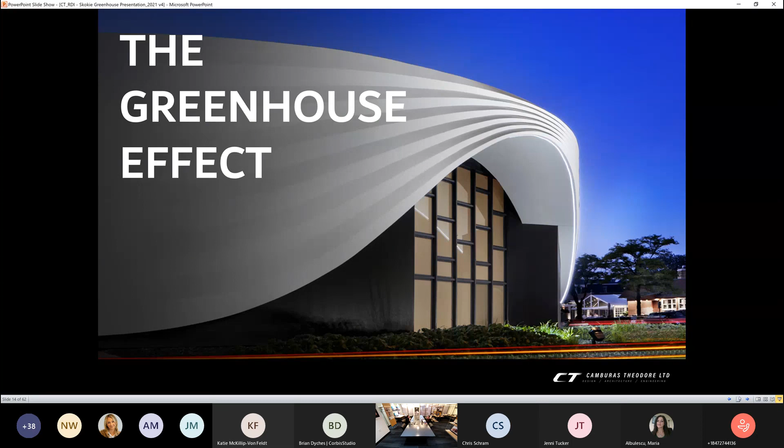With that, we're going to start our journey on Greenhouse. And for those who aren't too familiar with the greenhouse, we're just going to run through a couple of drone shots that showcase the exterior, the facade, and take you inside to show our effort in translating the kind of curvature and making a cohesive design from outside in.

Also, if you're not familiar, we were working with an existing building, which we'll get into in a moment, showing our site analysis. But you can see, like Peter was mentioning, the power of subtraction, some of these kind of philosophies and design methodologies that we used to inform the form, in addition to the site and the massing.

So here's a quick diagram just showing some of the things we were looking at. The fact that the building was oriented at the street corner was very unique. It was bookended by two towers. The curving facade, obviously very unique, all things that we wanted to capitalize on.

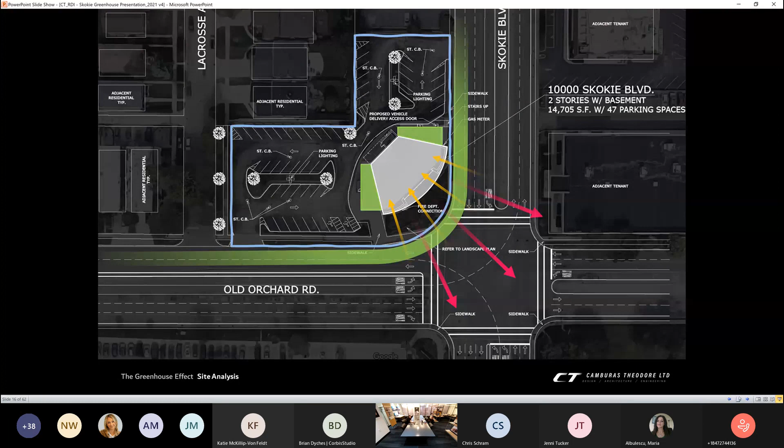And with the addition of a massive curtain wall system that just let light into the space, into a two-level space that we had to utilize. And here's just another aerial view of the building.

So on this slide, I want you to take a look at what's going on here. Over the years, this has been an amalgamation of multiple designs, multiple design ideas, and a morphing from traditional to postmodern to classical. It started out in the mid-'60s as a Sidney Epstein store. It was a flagship store, and it changed into a furniture store, a bank.

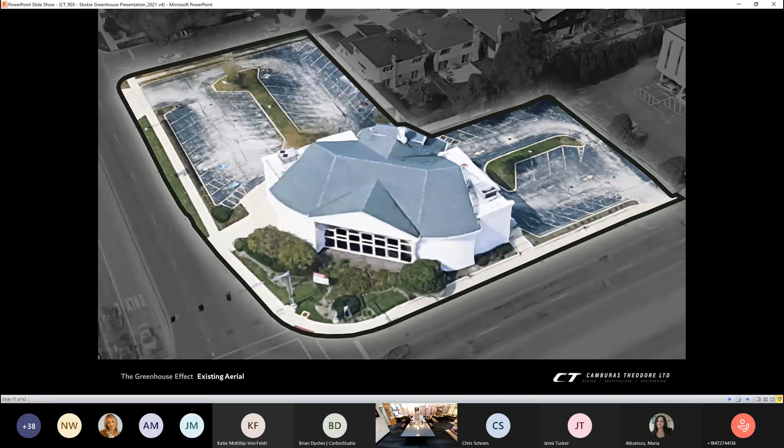It's had several lives, but this is what we were given. So for better or worse, this is kind of where Greenhouse started. And another perspective view of the existing building, diagramming some of the moves and gestures that we thought of in plan that translated to a perspective view.

A few things we'll get into, but about the curve, it starts gently lifting off the ground and crescendoing at the center, creating the massive opening for the sunlight to bleed into the space. Capitalizing on some of the good aspects of the existing geometry, and eliminating, like Peter mentioned, some of the things that were either add-ons or did not belong to the intrinsic massing of the building.

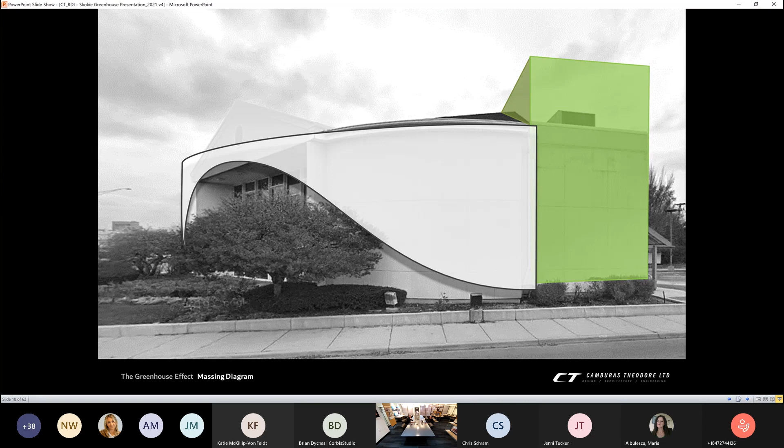So hence removing the gable roof. Stepping back is not necessarily a bad thing sometimes. It lends clarity to where you're going. If there are pieces and components that are worth saving, we save them. If they're not worth saving, we eliminate them.

And from a retail perspective, the towers made sense as these towers essentially for signage, but also our gesture was to increase the height of the towers to promote the signage and also to conceal some of the rooftop units that were going on in the space.

You can see what was added through the process was a pleated texture across the facade, which was not originally there. Through the process of taking our sections, we wanted to capitalize on what we were doing already with the curve and use technology to our advantage to push the envelope beyond just ordinary geometry.

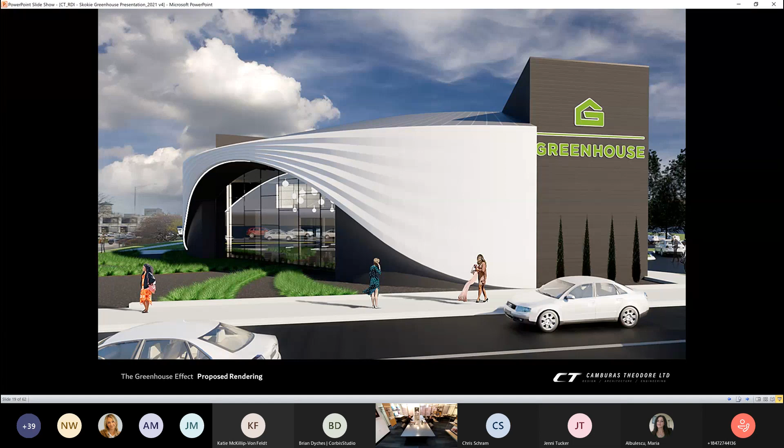It would seem counterintuitive in retail architecture to obscure some of the windows, but we resisted the opportunity to put all the windows front and center on the street because we believed it'd be more alluring to draw people in by obscuring some windows and creating a sense of anticipation, rather than exposing it all, which is the knee-jerk reaction to typical retail architecture.

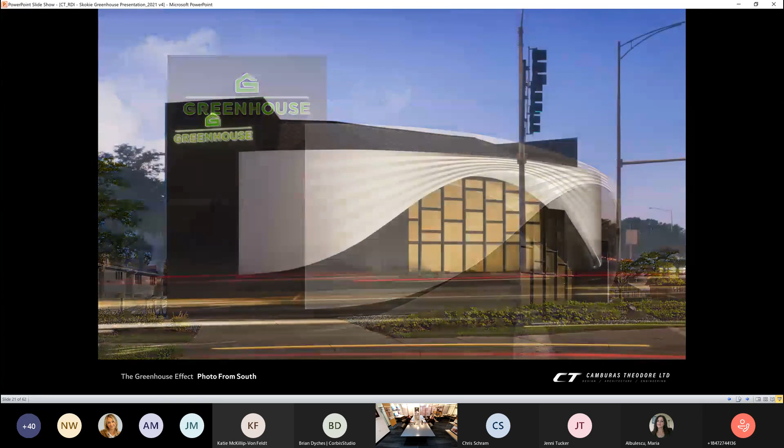Gradient. Now we want to talk about this form and what's going on with the gradients. Having the ability to use technology, we're going to show how we actually use those tools in the next few slides. This might seem like an overly simplistic quick view, but what's going on here is actually far more complicated than it appears.

The gradients of the lines sinuating up and down in this form actually change in height and dimension, decreasing to zero. They go from a gradient of 0 where they touch the ground to an offset of approximately 6 inches, increasing in width and size as they decrease in dimension toward the ground. There are complex shapes turning the corner, changing in gradients, size, form, and function. Communicating that to a contractor or fabricator in the past would have been a very difficult task. We're going to show you the tricks that made this possible.

But when you look at this, everything flows. It's simple and easy on your eyes, but it's far from simple from the standpoint of complexity, erection, and construction.

To Peter's point, it took a lot of iterations to arrive at this solution, thanks to Peter always pushing to fine tune it. It could have been protruding too far at the top, or there was the idea of it coming to a zero point — could we really execute that? Everyone knows it takes a team to build something like this, so we had to work with the contractor, the budget, and the city, all these elements to come up with a design that was buildable.

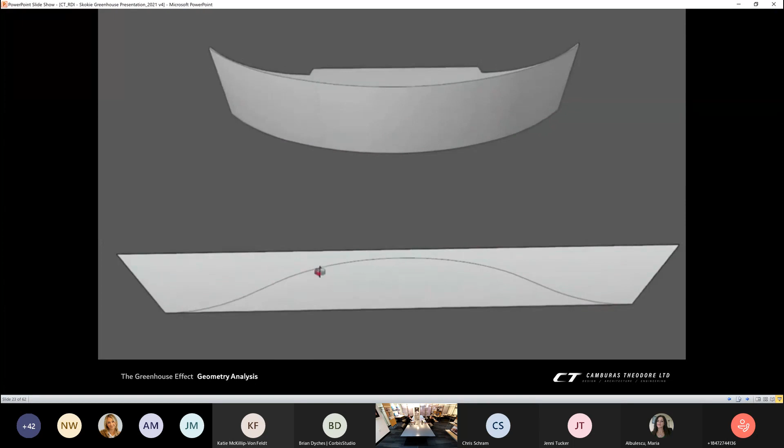What we're going to show you in a moment is just the final iteration, but we went through a lot of different tests. There's a longer version of this video online you can search for under our name and Skokie Greenhouse, but this essentially shows the Boolean effect used to get the curved geometry.

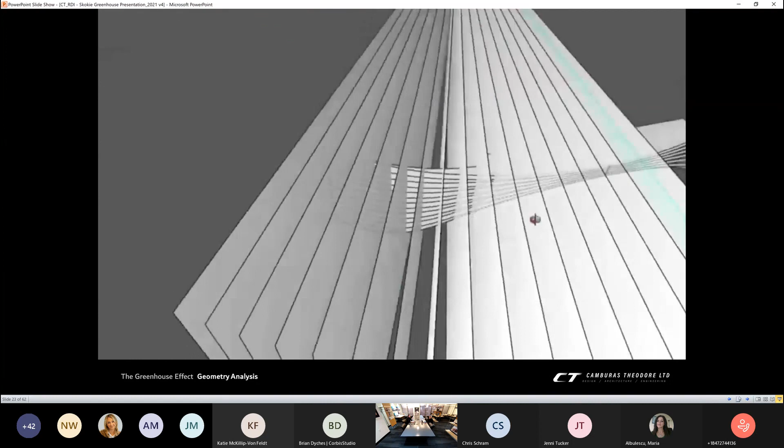This is a quick look at lofting the line geometry for each individual pleat, as we'll call them, and the use of parametric design translating into our Revit program. Some of it was modeled in SketchUp, then brought over to Revit. You just saw how we radiated the sections across the facade and how each of the panels is cut and individually numbered to be put onto the facade.

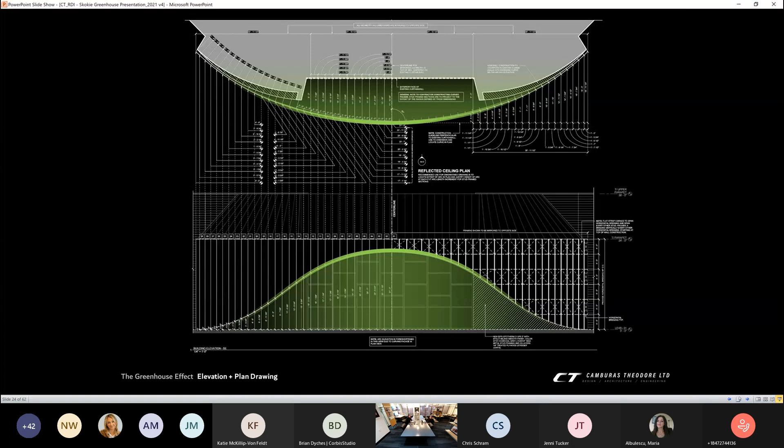All of that information is translated into a drawing like this for the curve. It looks complex, but it's really only calling out the different elevations and plan views to achieve the double curvature facade, which translates into our framing system. In the video, when we took the radial section slices, that was calculated on an arc radius of 16 inches, so we knew we were working on a framing template the framers would use and sheath accordingly, working on a 16, 32, 48 kind of modular system for our foam pieces.

So what you're seeing here is the skeleton before it was sheathed. The whole time this was going on, we were constantly checking and rechecking what we thought was right, what's proportionally correct, and what the gradients should be. This is truly a project that kept changing until the end. I don't mean changing from a standpoint that things fundamentally changed, but it kept getting further refined by having these tools and applying them in the real world sense.

We wanted to make everything as precise and accurate, but as buildable as possible. Without these tools, we would never have been able to convey to the contractor what our intent was. We literally had to construct this in the virtual sense and the real sense together so we could convey to the contractor how he was going to put this up. Contractors are really only as good as the tools you give them, but these tools made it like an erector set for them and gave them the roadmap to a successful project.

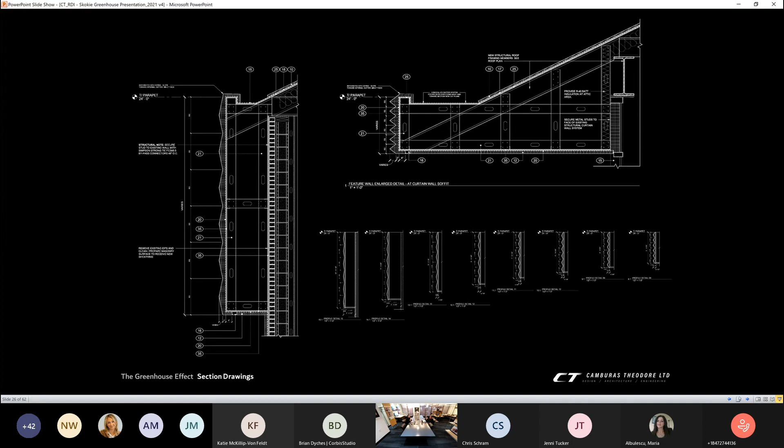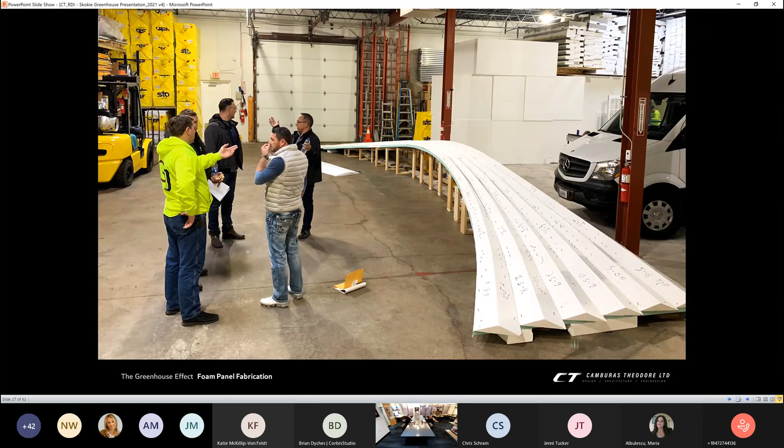We're going to show you some slides where the contractor actually gets engaged. We're in the shop with the contractor, literally building the mock-up with them, CNC cutting the foam with hot wires and machines, and putting together the pieces in a numbering system so each section could be broken down into small segments and erected in the field exactly the way it was meant to be designed.

If you were to try to construct this in the field, or rasp the foam in the field, or leave it up to the installer in the field, the precision would be off and the project would fail dramatically. But by controlling the limits and extents of each piece, and knowing exactly what those pieces should be by numbering them and erecting them as in this photograph, you could make the impossible possible.

Not only could you make it possible, you could start creating even more complex designs and do it within budget, because you're essentially giving them small segments of what your ideas are, and limiting how far they can go on their own before the constraints are put in place. These images are a great example of how we thought through the actual physical implementation of all the pieces to make a concept a reality.

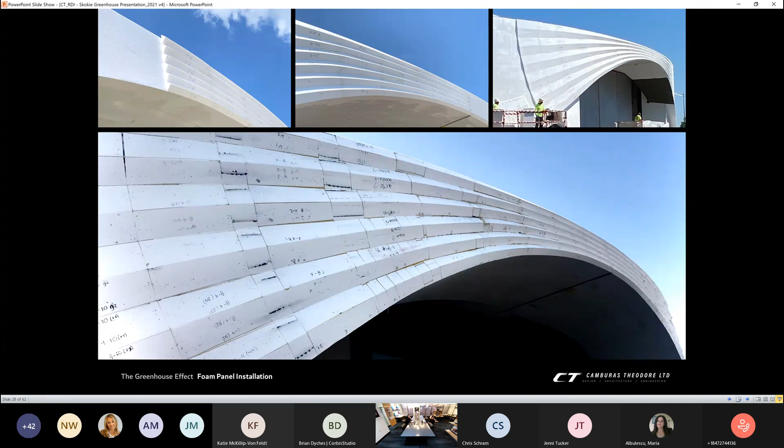The beautiful finish texture, after it was sanded, rasped, and all the filler pieces were added, is a plaster finish — more than just an EIFS finish. It's a Sto product, one of their most advanced lines for our temperature and climate zone, so we know it's going to hold up.

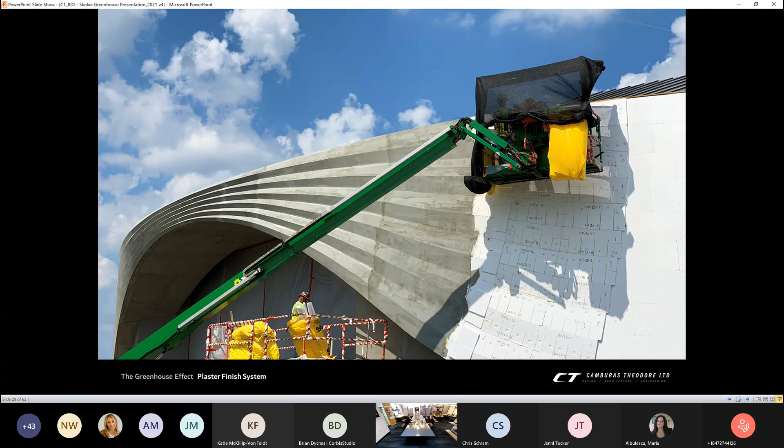It's finer than a sand grain finish, so it looks plaster smooth, like drywall smooth. It's basically a level 5 plaster finish that these guys sanded, added, and sanded again to get it to this point where there's not a blemish visible from the human eye.

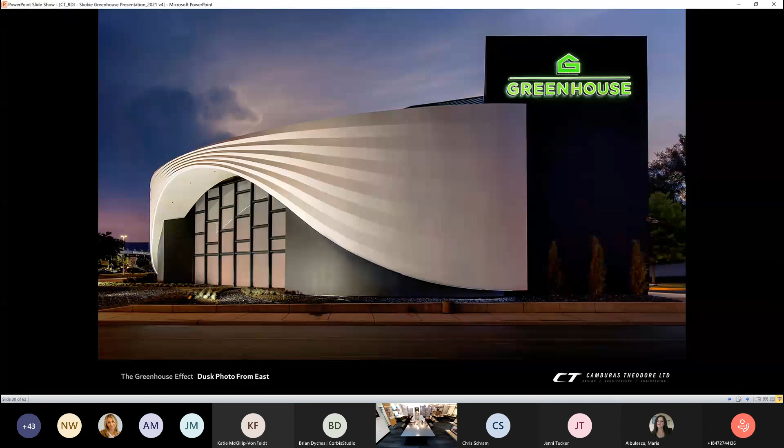This was actually a research project for Sto. They took it upon themselves to reach out to us and use this as an example for the product, to showcase what it's capable of — that it's more than just a rectilinear foam panel with reveals type of material. It can be used in combination with the foam and some of these new fabrication technologies or methods to produce something like this. So here's just a couple of photos of the finished product.

Now we're going to take you inside the store, and Steve will walk you through the interior and the thought process in that evolution.

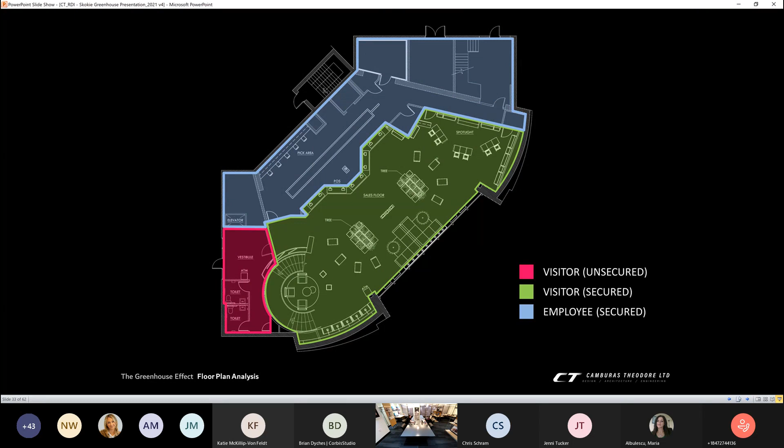The idea for us, again, was that we had an existing building to work with, but when we were using the power of attraction and the experiential factor on the outside, it was important for us to translate that into the inside so we had a cohesive project. Fortunately, some of the forms did carry in, and what you saw there was just the delineation between secure and unsecure areas. Here's a quick look at how we wanted to orient some of the interior spaces based on the window and the kind of double height space that you'll see in a moment.

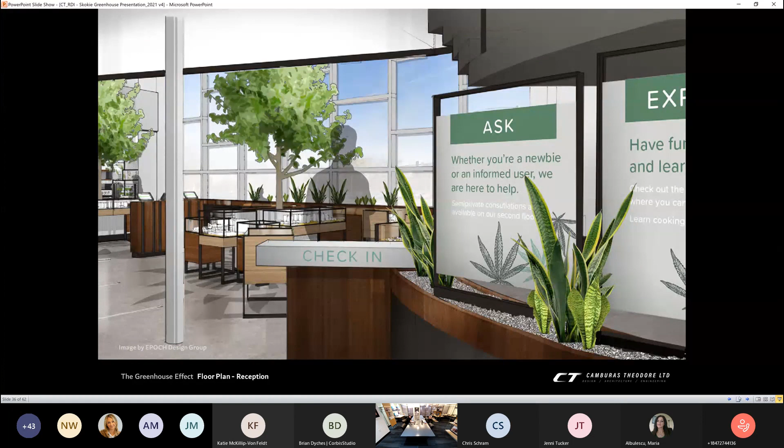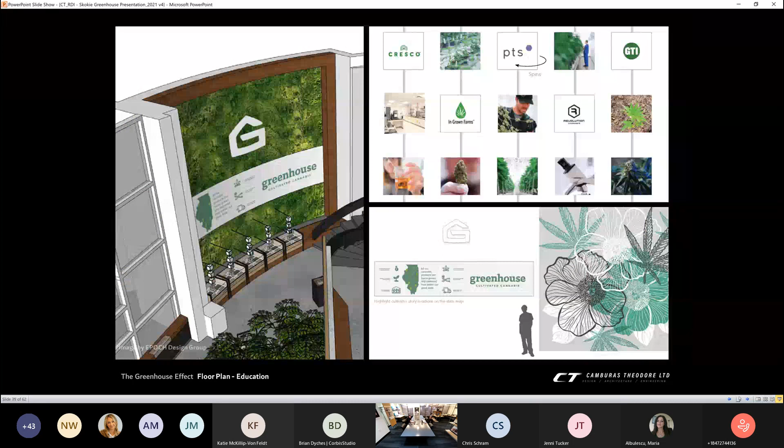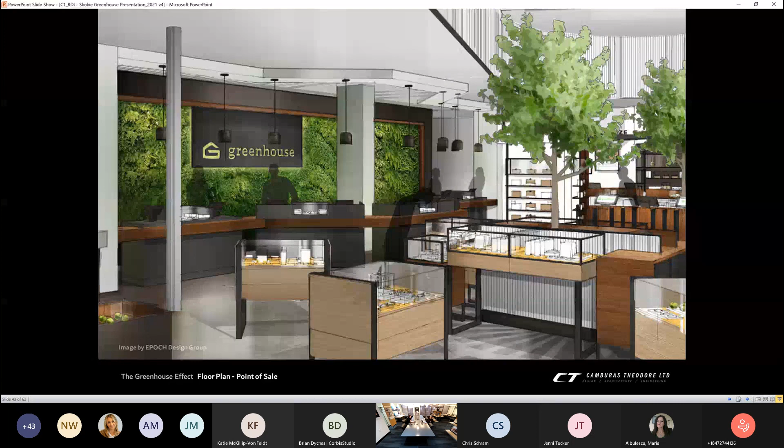So we have the reception, and for some of these things we worked with a team of interior designers to develop the idea of a check-in area, because this becomes more than just a place to buy recreational marijuana — it's also an education facility. We have educational zones with different little blocks and things like that, a demonstration area, and we oriented the point of sale and the double height sales floor to align with the double height window.

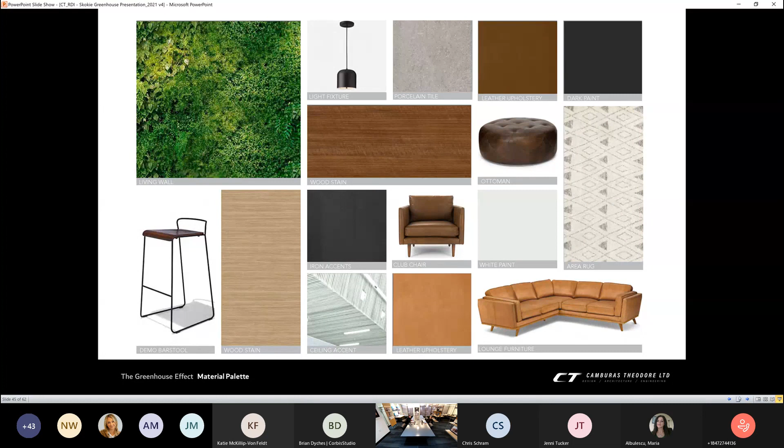Here's the material palette that was also developed with the team, striking a balance between familiarity, comfort, and cleanliness. The wood palette with the grass and the live wall—this is what it ends up looking like when it's all brought together on the inside.

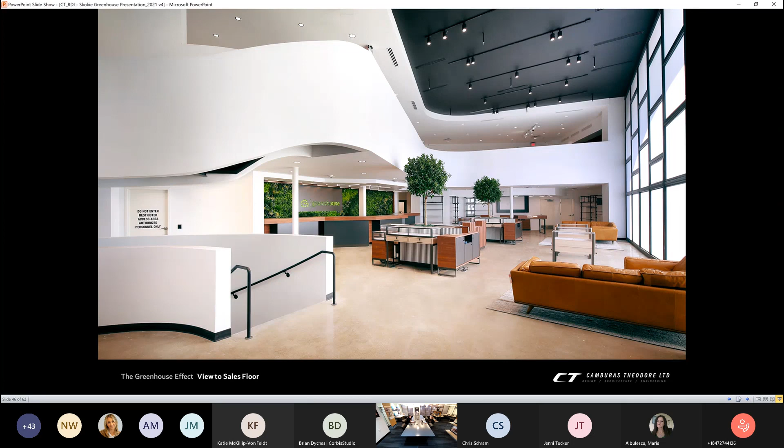You can see the curvaceous stair. For us, it was the big design moment—this stair wraps up and around and becomes the leading edge for the balcony. Here's a look at that with the green wall and the chandelier. We deconstructed forms that existed on the original stair and accentuated it in its purest form by highlighting its serendipitous nature. We clad the walls with white plaster and really took full advantage of that free-flowing motion that takes you up to the second level.

This last shot gives you the sense that you're not in a medical facility. The ambient light pouring in through the windows is muted by the film on the windows, so there's a soft glow—everything about the environment is calming. When you think of the product, its use, and the connotations in the past, this is counterintuitive to that, because now it's all about the experience. It's addressing medical needs, and people arriving at this destination for all sorts of reasons—whether treating cancer, epilepsy, glaucoma, or recreational use. The whole experience was meant to calm the consumer down and create a welcoming, inviting environment.

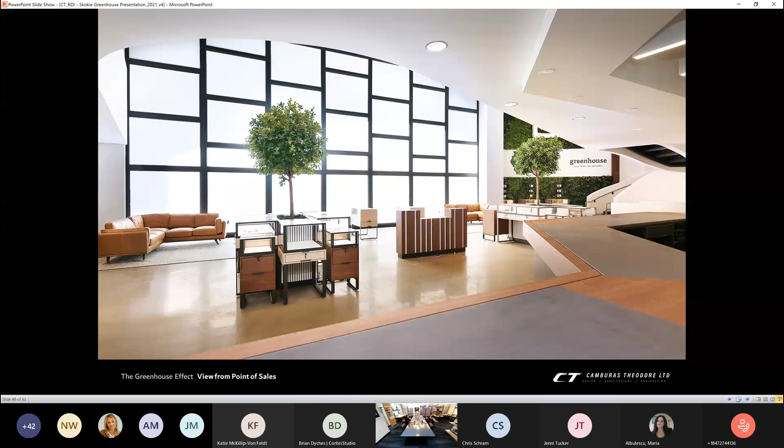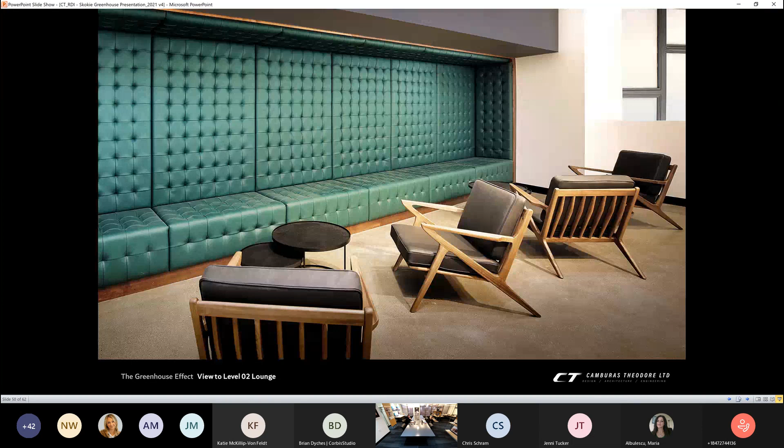Leading up to the second level is designated for online pickups only, with a lounge area featuring a built-in pleated bench that matches the material palette.

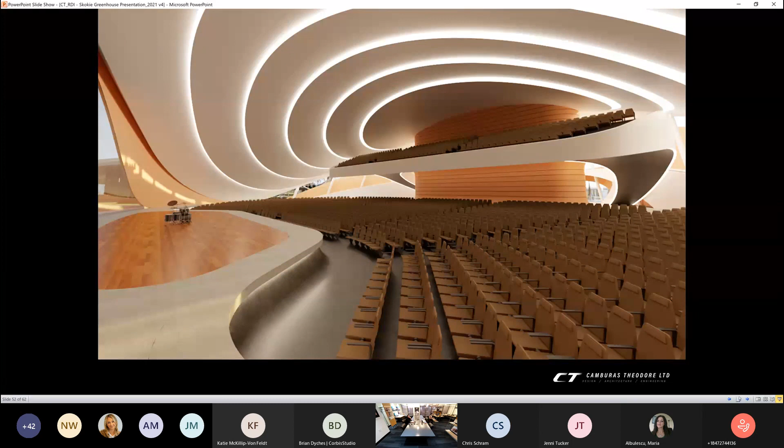Now we look to the future—we're going to show you some images of where we're going. This is an example of an event center we're doing in Florida. It piggybacks on nature's forms, and those forms transcend onto the interior of the building, so the exterior and interior become one.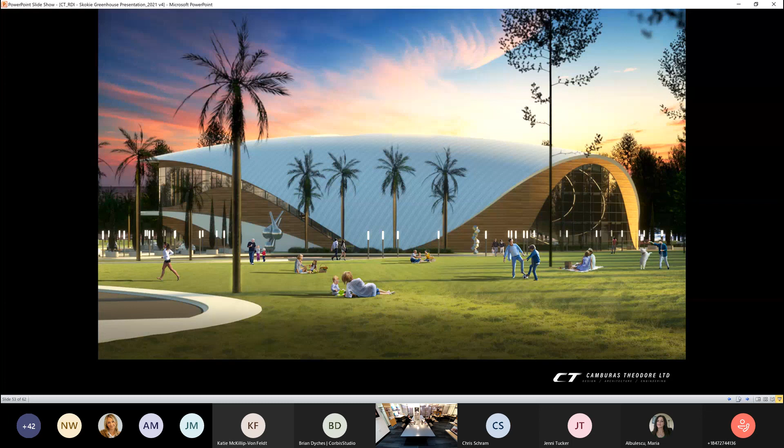What we learned from the experience on Greenhouse was that experience and the power of attraction is very important to retail design. For us, it was an opportunity to explore some of those methods and techniques and really start to translate them onto other building forms and typologies.

The building shell here becomes like a pair of hands that cup and protect the visitors and viewers in the space. As Peter mentioned, it's a civic auditorium for the larger one, and this is a playhouse that utilizes the same shape but scaled down. With our technology and the capabilities of using it digitally, some of these forms can be scaled up and down in a vector-based reality. So this is on the boards for us, along with a couple other projects.

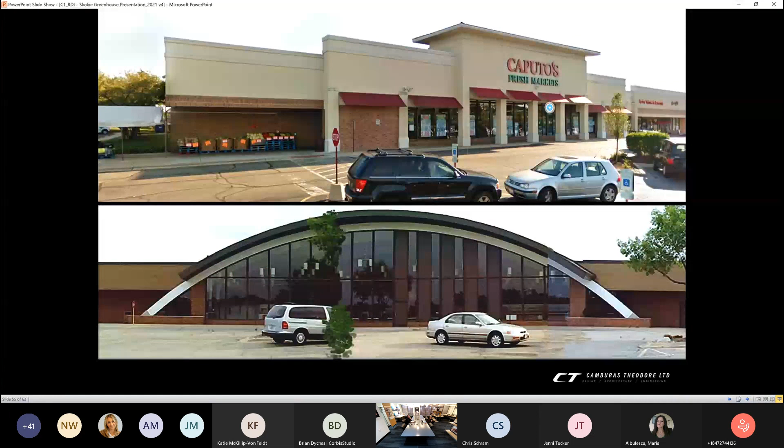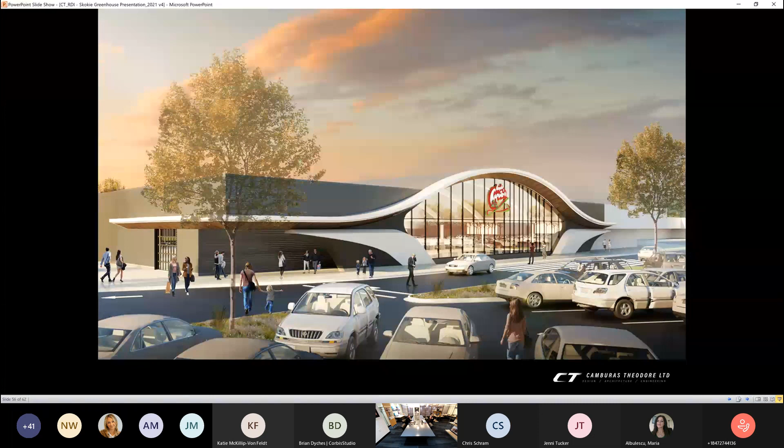This is an interesting project because it's going on right now. The image above is the existing Caputos; below was the Dominics from many years ago. What we're actually going to do on this project is deconstruct the building, go back in time, take advantage of the bowstring trusses in the form, and recreate this from what existed. So we're taking advantage of what the architects conceived of in the past, but making it relevant to the future and to today.

It's interesting because this is a conventional grocer thinking outside the box, asking himself—or asking us—how do I compete with Amazon? How do I compete with the bigger food chains? What should I do? Our recommendation to them is: find what's right for you. If we can make you successful by introducing the public to your store before they actually enter it, then we can attract new customers to your store.

This end user does a phenomenal job inside the store—the love and attention paid to the product, the food, the presentation is without compare. What's lacking is the connection between the architecture and the user. What we hope to do is bring the two together so that the person driving by who never would have thought of visiting the store is now drawn to it.

There's a uniqueness to the architecture, but it's not something conjured up on a blank sheet of paper, especially for examples like Skokie Greenhouse and now this, where we're utilizing the existing structure to enhance the forms, creating a power of attraction and an experience unique to the tenant.

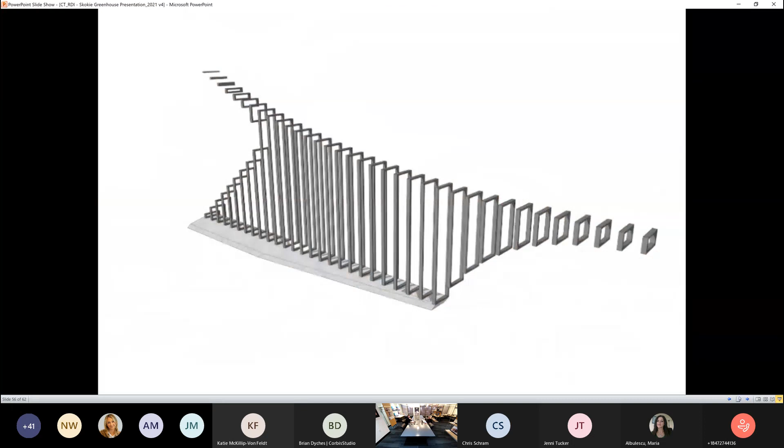We've got the power of these technologies and new ways to convey buildability, the constructability, to the contractors. Things like these animations or GIFs that show the buildup of all the components have become extremely important to how we discuss with the contractor and stay on budget.

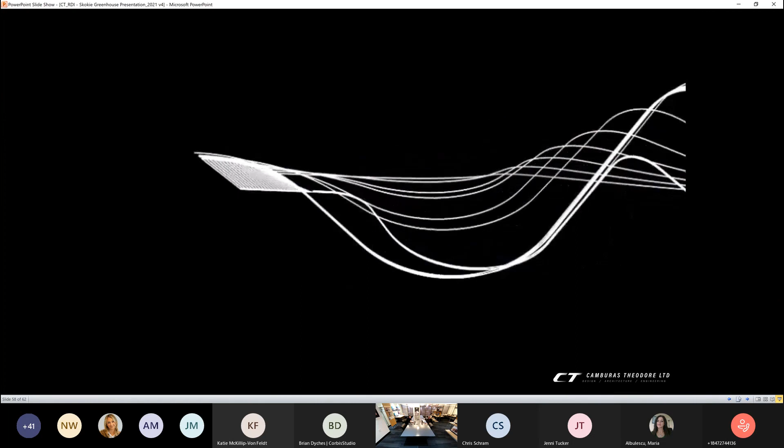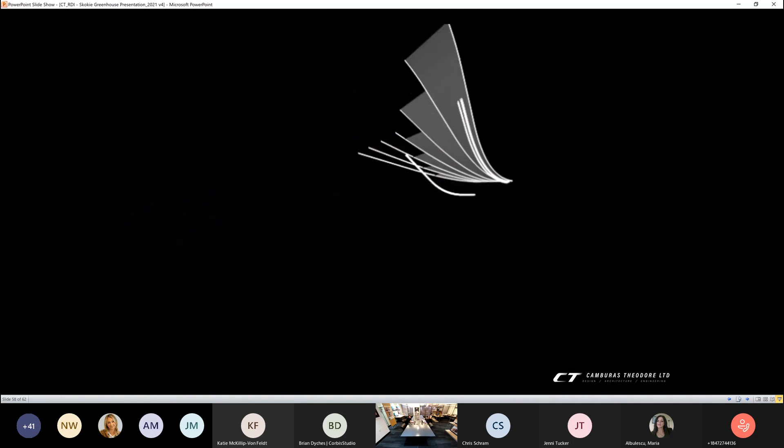Here's another example of the same grocer, with what will be their flagship store as a ground up. Again, utilizing forms unique to them, that have a story and connect to them. The idea was that this freeform canopy emulates the Tuscan hillsides, with a curving form that lifts up at the entry and touches down gently at one of the sides.

And here's an image of what that's starting to look like, an elevation.

Again, we're looking at a traditional grocer that you'd be hard pressed to believe would move outside their comfort zone to explore an idea like this. But kudos to them, because they realize forward momentum in a market bifurcated by so many users is a path forward for their prosperity, their legacy. So they've trusted us to bring them a new identity and forge a path forward for them.

But in doing so, we're not projecting our feelings or beliefs on them, we're drawing inspiration from them. As Steve alluded to, this was born out of the idea of the Tuscan hillside. We started by looking at the history of the user, going back into their town in Italy, and then using that metaphor as a platform to leap off of into the future.

So with that, we're coming to the end, my friends, and we're going to go to the next slide. This is pretty simple, but we're going to end where we began. A simple line, but what a beautiful line, a sketch more beautiful than anything ever created on a computer device.

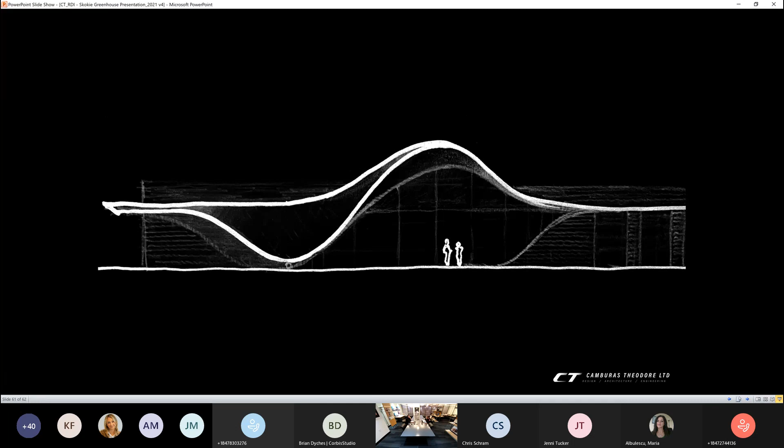The heartfelt love of a child creating a drawing on a piece of paper with no reference to any photo or examples, just their imagination. So we all dare to explore without fear of failure. We find a path of truth and honesty forged in what we feel is right, not what others expect.

What you've seen today has been a stepping stone for our journey. We're all on the same journey. It's our hope that as you spend time with us, we'll get to spend time with you and look at your works. We think every child is inherently born with this creativity, and it's only the child that is tamped down by hearing no, pushed away from dreaming. We're dreamers in here, and I think everybody on this call has probably got a little bit of dreaming in them.

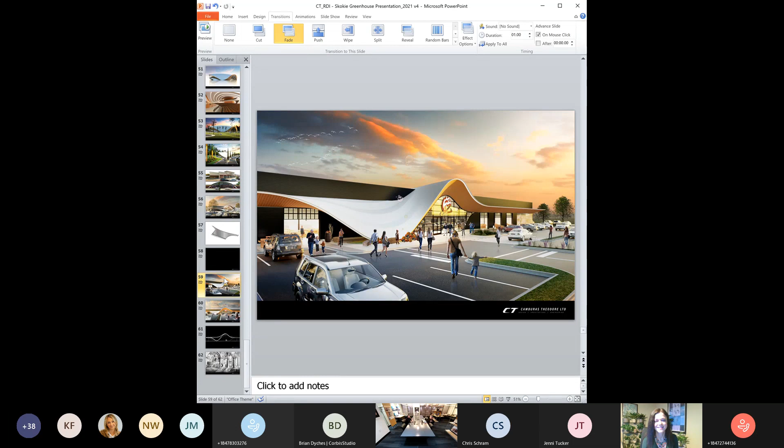There's a steep gradient there, so even though it looks very approachable and that you can walk up it as you approach it, the last gradient on that curve is almost perpendicular to the ground. You'd have to be a good rock climber to get up it. But the fact that you're looking at it and it's alluring you to the building - it's successful.

Our bigger concern is, is all that snow going to come down on you? So we're working through all those issues, and we're going to resolve every issue, whether it's snow related or people climbing it. But we have considered those things.

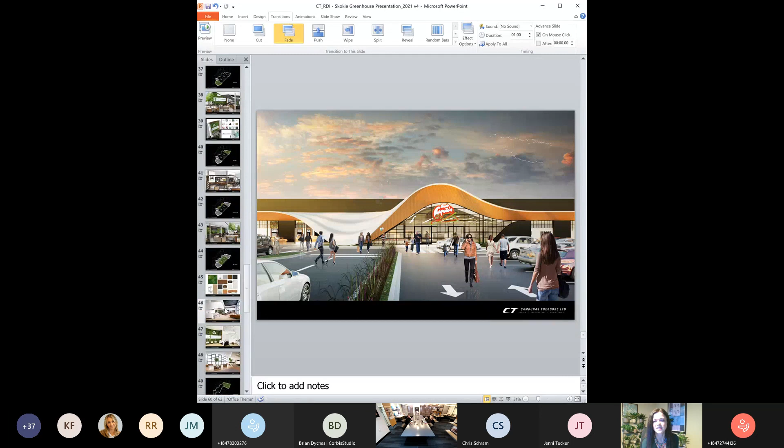Another question from Chris regarding the greenhouse store - what was your biggest lesson there? I'm assuming there were a lot of challenges with regulations and the neighborhood, but is there a lesson you want to share, or what was the biggest challenge?

Get in fast. Yes, follow your heart as quick as possible and execute as quick as possible. If this had been studied too long or thought about too long, it probably would have never happened. Sometimes in life, timing works to your advantage and sometimes it doesn't. When it worked to our advantage, we had the benefit of a lot of momentum on our side - the world hadn't collapsed, everybody was happy, things were happening.

We took that positive energy and used it with our presentation to the village, our presentation to the client, and with the tools that we had. Had a month gone by, this project would have never happened, and I don't know what that corner would have looked like today. So the lesson we learned is if you have a good idea, share it, communicate it, move on it, and don't be paralyzed by your ideas. Don't fear failure.

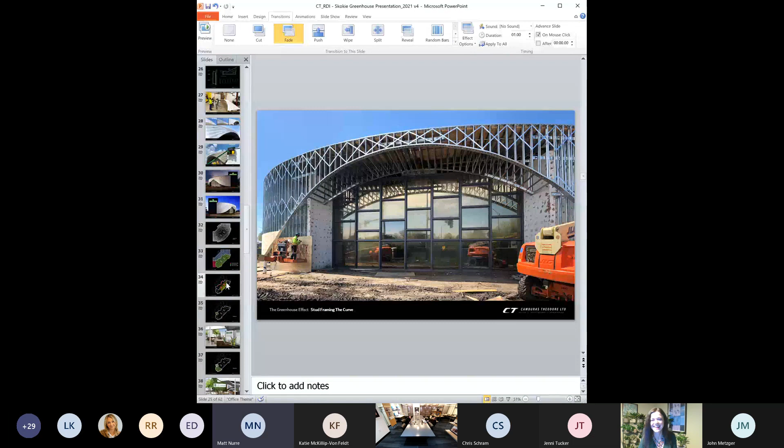Yeah, absolutely it did. Are you asking what time the deliveries are done and what the security code is? Because we can't divulge that information. But no, just joking. But if you have that...

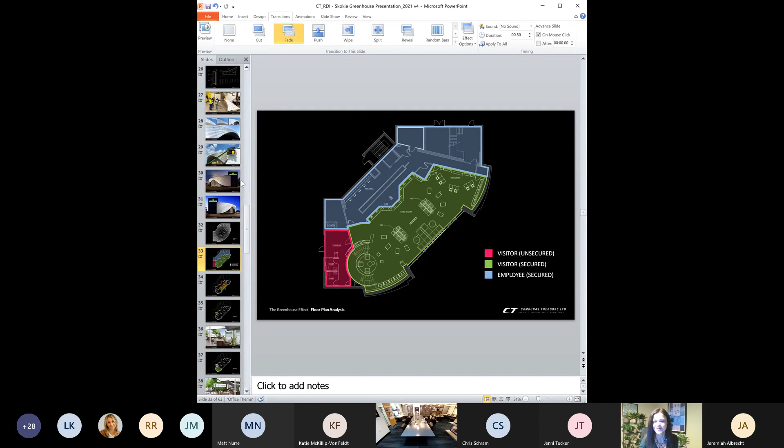Any other questions from anyone? I know we have people that aren't from this area. So did we convince you to come see the building? I'm assuming yes, I'm going to check it out. It's pretty cool. Absolutely. Yeah, so hopefully the next event will be in person. And well, you can buy your product here and go to the restaurants across the street. It's like a one-stop destination.

Yeah, it's interesting because the world's changing, right? We didn't set out to necessarily mimic a marijuana leaf or have a prescribed image of what this building should look like. We wanted to be a little more sincere with our form. We didn't tailor it to necessarily broadcast what was going on in the building. Our goal was to create an art form on the corner.

Like Peter mentioned earlier, when we were standing at the street corner asking people what they thought of it, it was, yeah, it's different. It's cool, it looks like a curtain is being lifted. We were interviewed by Blair Kamin before he left the Tribune, and that was one of his questions too - was it intended that you're lifting the curtain on an otherwise concealed industry? We said no, not at all. It happens to look like that, but for us it was really about the power of attraction, creating experience. We were influenced by the existing form of the building, and it was just an evolution that came to this point. So there was no prescribed form or sculpture we were trying to mimic - it really was just the result of all these problems that accumulated to this result.

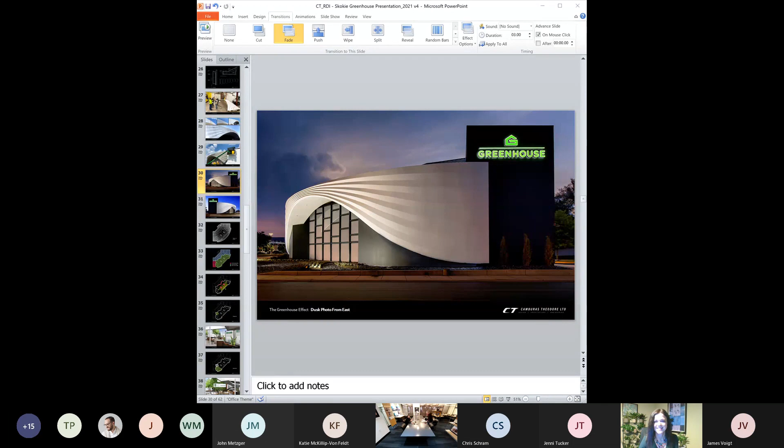Maria, don't look so serious. You're still on. Do you want to still, we have to get together for... should I wait? Stop the recording. Oh yes, that's a good idea.